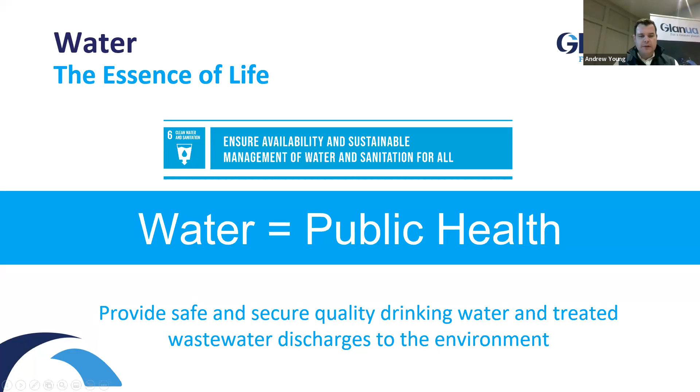I suppose what everyone's maybe thinking is that we've no shortage of water in Ireland. Sure, doesn't it rain every day? And we're surrounded by lakes, we're surrounded by rivers.

We are very fortunate to have sources of fresh water in Ireland. There's still many countries out there that rely on desalination processes to generate potable, clean drinking water. We're very fortunate to have sources of fresh water readily available to us. But there's a lot of treatment that goes on behind the scenes to make that water fit for human consumption, safe and secure to drink. That largely goes on behind the scenes.

Another common misconception is that we have the most beautiful rivers and beaches in the world, and that's correct. We do have very beautiful rivers and beaches, but the reality is that there's still locations around Ireland where we discharge raw sewage into our watercourses. Until recently, there was over 40 discharges of raw sewage around the country.

I know I'm painting a very bleak picture there, but thankfully, since the formation of Uisce Éireann in 2013, over 60% of these untreated agglomerations have been alleviated, and the remainder will be alleviated by the end of 2025.

So the impact of water and wastewater on the municipal, industrial and pharmaceutical sectors. Uisce Éireann, as I said before, was formed in 2013. They produce and supply about 82% of drinking water to the population of Ireland. The balance then is made up by privately owned cooperative group water schemes and private household supplies, be it through borehole sources or spring sources.

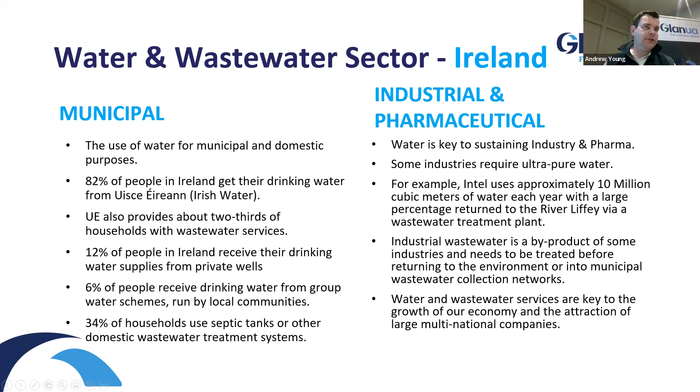As I said before, the water cycle is a continuous cycle from drinking water to wastewater and back into drinking water. It's been in operation for millions of years. It starts with abstraction at source, and we're very fortunate in this country to have multiple sources of fresh water from lakes, rivers and streams, but also groundwater from boreholes and springs.

Generally, it starts with abstraction from the source, some level of screening, and then we enter our treatment process. Within this country, we have various different types of treatment processes, depending on the raw water characteristics. But commonly, we would use a process called CFC, or coagulation, flocculation, and clarification, followed by filtration. Then we'd have various different chemical dosing systems in terms of pH correction, chlorination for disinfection, and also UV disinfection as well. After treatment, the water is stored in treated water reservoirs.

Either above ground tower reservoirs as indicated on the graphic, or ground level reservoirs or buried reservoirs, before distribution through networks into domestic households, but also into industry and pharmaceutical facilities.

From those domestic and industrial facilities, then there's a collection of wastewater. That wastewater is collected in sewer networks before being transported into wastewater treatment plants, where it undergoes preliminary screening, sometimes grit removal, fats, oils, greases removal, before entering a treatment process, which generally takes the form of primary treatment, some form of biological treatment, a final clarification, and then return into the environment.

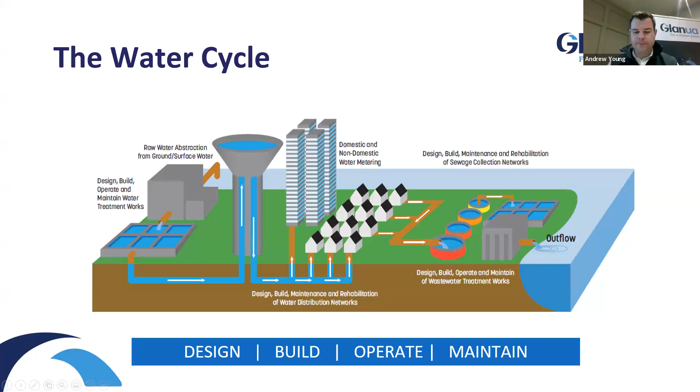A little bit about Glanua then. I suppose we pride ourselves in award-winning innovations and engineering solutions. We're a team of around 350, actually about 370 employees now within Ireland and the UK. We're on a growth trajectory at the moment.

We're on track this year for revenues up on 150 million for our group, which is great to see. We're growing rapidly both in Ireland and in the UK as well. We have offices and manufacturing facilities all across the UK and Ireland.

In Ireland, our head office is based in Loughrea, County Galway. We also have a regional office and manufacturing facility in Navan, County Meath, and offices in London in the Thames Water region and in Sheffield in the Yorkshire Water region. We have over 65 international clients, I'll go through some of those in a moment.

We're all part of the Glanua group, and we've recently went through a bit of restructuring ourselves. Glanua, or Glan Agua as it was then, was bought by an Irish-owned company called BHSL last February. We obtained a number of sister companies, including Hydro International, and we've rebranded our entire group now as Glanua Group under the one umbrella.

Glanua Ireland and Glanua UK offer municipal water and wastewater solutions in both Ireland and the UK respectively. Glanua Industrial offers water and wastewater solutions in the industrial and pharmaceutical space, and also water recycling and water reuse solutions to industry. Glanua Civils underpins and supports all that with civil engineering solutions, primarily for the water industry.

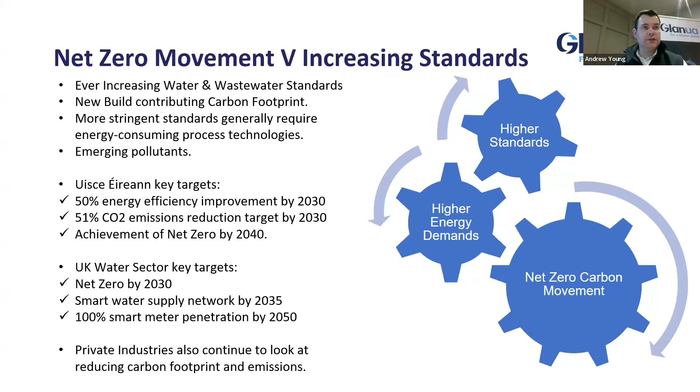I suppose with challenges brings opportunities, and we ourselves, thankfully, have availed a lot of those opportunities and allowed us to grow as a business. Uisce Éireann invests about 1 billion annually. I think this year they're set to invest about 1.1 billion in capital infrastructure, and this is set to increase to about 1.6 billion in revenue control period 4, which spans from 2025 to 2029 inclusive. So a huge amount of growth in terms of investment.

The UK water sector invests about 10 billion annually, and obviously it's a much bigger geography, and they're about to embark on their new investment cycle in AMP8, similar revenue control period. In the private sector, industry and pharma continue to require capital investment in water and wastewater infrastructure.

So I'm going to just spend the rest of the presentation to highlight, I suppose, some of the opportunities that we have seen in the industry: early contractor involvement, sustainable solutions, modular design, DFMA, and offsite fabrication.

I'm going to talk for a little bit about early contractor involvement, I suppose how this has been a game changer for ourselves, the supply chain in general, and also for Uisce Éireann. Just to give a little bit of background as to how ECI came about: as I said before, Uisce Éireann would have been formed around 2013, became active really in 2014.

The traditional procurement route for Uisce Éireann was to bid projects and release projects on a one-off lump sum basis out to the market, which meant they had to issue information to a consultant who would draft a concept design, sometimes obtain planning permission on that concept design, prepare a tender document, and release it to contractors who would bid the project. Five to six contractors, depending, would bid a project. The tender would be returned, evaluated, awarded. Detailed design would follow on construction. Quite a lengthy process involving a lot of resources and a lot of different people for one outcome, one isolated project.

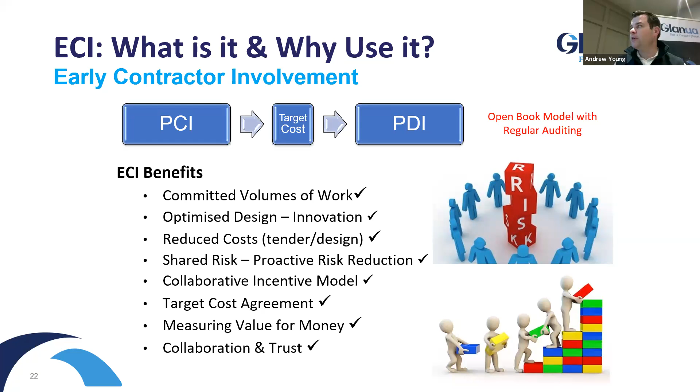In contrast to that, the conventional versus the ECI delivery route, sometimes there can be a lack of clarity. We're working in a traditional tender under huge time constraints to deliver a design that's robust and fit for purpose that we can stand over. There's conflicting objectives - our clients might want belts and braces in terms of a water treatment plant, while we're trying to get the most economically advantageous tender in a short period of time, and ultimately there might be conflict within that. Differing agendas generate internal stresses, and we have wasted effort, as I said before, in terms of multiple contractors bidding a project with one successful, ultimately leading to failed outcomes.

In contrast to that, with a collaborative type model, there's clarity of purpose, everybody's pulling in the same direction. We have joint objectives - we're all measured on the same KPIs as a team. Complementary skill sets, so we can pick very specific skill sets.

So on the ECI we're involved in at the moment, we have ourselves as contractors, so we have the constructability experience. We also have our in-house design team. We have a technical assurance consultant who provides oversight and governance over our designs, to make sure we're on the right track. We have our client as well, another key stakeholder. And then we have a project management consultant who makes sure we're keeping on track as regards the program. As joint management, we're all one team delivering this. We have a joint program board, which I'm part of, and we meet quarterly to review that report. We've integrated processes, a fully integrated team, and ultimately a mutual benefit.

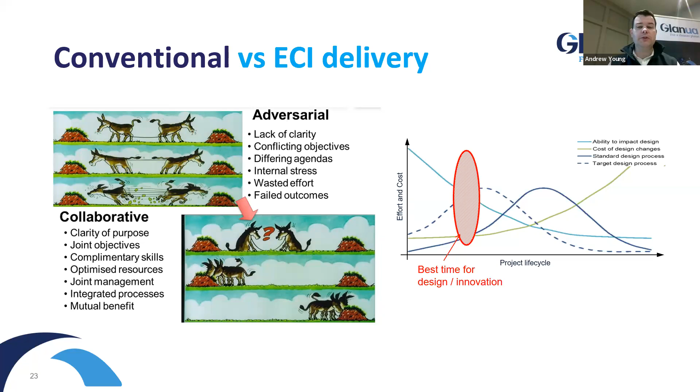To summarize the shared advantages of the ECI: it's a collaborative design construction process focused on quality and efficiency - one team, one goal, heading in one direction. Speed of mobilization, because we have that pipeline of work, we're able to plan projects to roll one after another in a fixed geographical region and build teams, and that allows us to mobilize to these projects within one week of contract award.

Two project examples would be Leixlip UV, where we undertook to install a UV treatment process. This was a design, construction and commissioning project, completed within 8 months. A traditional model of appointing a consultant, doing a concept design, procuring a contractor, detailed design from the contractor and construction would take approximately 3 years.

Similarly, Boherbue wastewater treatment plant in Cork, which has just been completed, actually required planning permission in this instance, yet was still completed within 4 years. Again, the traditional model we would have been looking at about 7 years. So we still very much involve consultants in terms of design development, but rather than consultants doing a specimen design, those consultants are now working with us to develop the permanent design. It's the most efficient use of resources as a result of all of this - we're not tying up people in multiple different processes and steps, tendering multiple projects.

And it's an open book model, so this builds trust and provides full transparency of cost to the client. There's an incentivized pain-share, gain-share mechanism within this, to make sure we're all heading in the same direction and promoted to be efficient, because we ultimately share a gain with the client. For me personally, I think this is a game changer for the industry. It was the first of its kind in the sector in Ireland, and I'd say it's definitely set to be the future of contract delivery in the water sector, and there's opportunities within the wider civil engineering space as well.

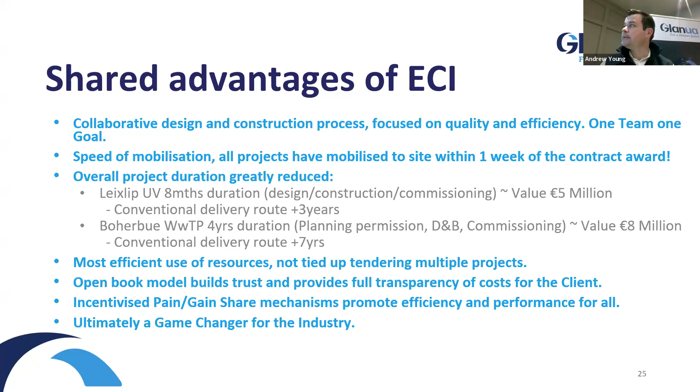Sustainability - I'm probably going to do 2 slides on this: one about what's happening at the moment in the water sector, and another about what the future of sustainability looks like. Glanua as a company, our vision is to be a leader in the water and wastewater industry by providing sustainable and innovative solutions and technology that will ultimately positively impact our future and meet the circular economy needs as well.

In terms of what's happening right now, renewable technologies need no introduction. Examples: solar panels - that's Thurles water treatment plant in County Tipperary, where we installed a solar system on top of the water treatment plant to supplement the energy supply on the plant.

Anaerobic digestion probably primarily exists on the larger wastewater treatment plants at the moment. I think there's definitely scope to roll that out to medium-sized treatment plants as well, potentially even with smaller plants on a more containerized, modular basis.

We also install a lot of hydroelectric turbines on plants. So where we have, for example, mountain lakes or mountain streams or rivers supplying into a water treatment plant, we can harness that excess delivery head, put it through a hydroelectric turbine, and generate electricity to part-supply the plant. We also have nature-based solutions, which are key as well.

The photograph is of sludge drying reed beds in County Carlow that treat the wastewater sludge developed on site, meaning it doesn't have to be transported off site, again decreasing the carbon footprint of the wastewater treatment plant. There's also a lot of work being done on integrated constructed wetlands.

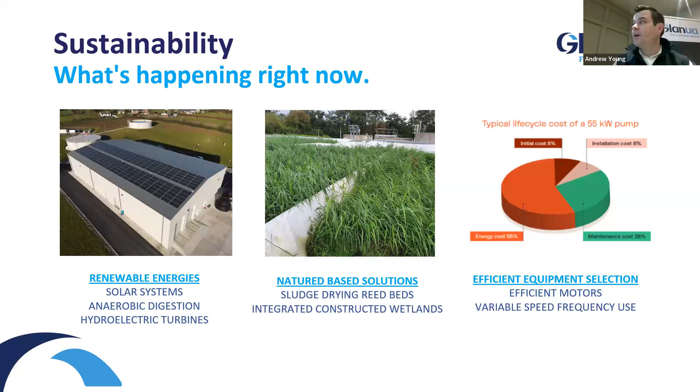And obviously with higher energy costs, there's higher energy consumption. So where it might be perceived that a pump is maybe €2,000 more expensive, if it has 0.5% more efficiency, then it's going to pay off in the long run to have that more efficient pump, and obviously it decreases the carbon effect also of the pump.

In terms of getting to those previously mentioned net zero targets, I suppose the industry perhaps knows what steps 1, 2, 3, and 4 are in terms of the net zero movement. That probably involves some of the technologies on the previous slide - renewable energy technologies, integrated constructed wetlands, etc. But we probably just don't even know yet what 5, 6, 7, and 8 are. And that's where innovation in sustainable technologies comes in.

I think we're all going to have to work together. There's a definite ask out there in the industry for the supply chain, for suppliers and contractors alike, to come to the table with our clients and try to innovate and come up with new solutions.

I suppose two examples of what this might look like just highlight how we're moving towards more of a circular economy. Sludge is no longer seen - municipal wastewater sludge particularly - as a waste product. It's actually seen as a sustainable alternative material.

Municipal wastewater sludge can be used in a process called pyrolysis, which is effectively combustion of sludge or any organic matter with little or no oxygen, which generates a byproduct called biochar. And biochar can be used for soil conditioning, for example, so it's a useful byproduct.

I think we're also going to see a lot more of a move towards alternative materials - certainly alternatives that have a low carbon footprint. We may even have to force ourselves to look a bit at things like where traditionally we would have looked at a water tank as reinforced concrete. Do we look at alternative materials such as steel, which might have a lower design life, but maybe it's recyclable at the end? All these different considerations will come into play.

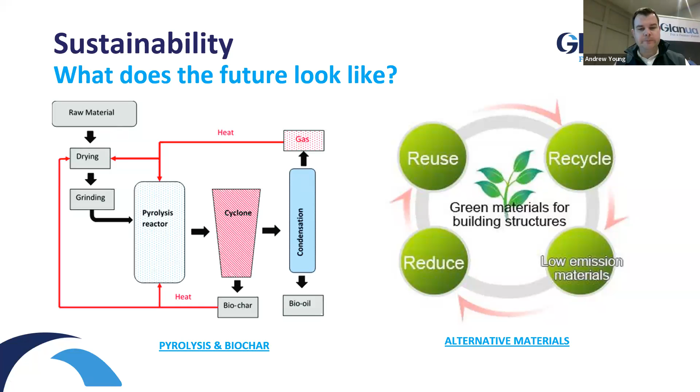So just in terms of modular design, I suppose the industry, like a lot of industries in the construction sector, is moving more and more towards offsite manufacturing and assembly. It's probably a little bit more challenging in the water sector because of the scale and size of the assets in terms of tanks and infrastructure in general. But we're always looking to see what we can modularize.

The photograph on the slide is of a modular water treatment plant. We're building six of these at the moment for Uisce Éireann, which is essentially a mobile water treatment plant that can be lifted on the skid frame, as you can see, transported on the back of a truck, dropped on site. We connect the pipework, the power, and it's into operation. I suppose the benefits of modular construction are far-reaching.

We have reduced time spent on site, which obviously reduces the health and safety risk on site. We have faster delivery times in a controlled environment. We have reduced downtime and interaction with the existing system because it's all manufactured off-site, dropped into place, connected up, and away we go.

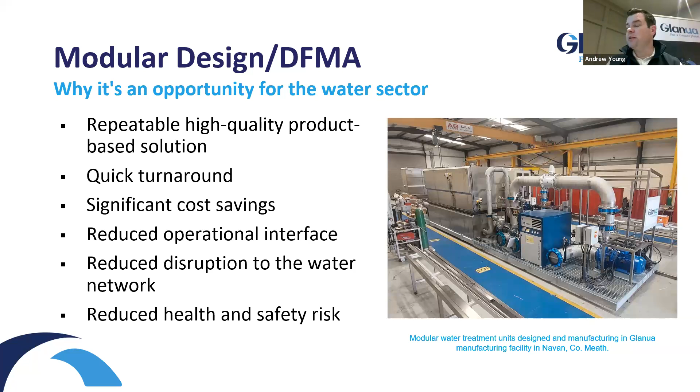With greater quality control, we're in a quality controlled manufacturing environment with procedures around health and safety. We can complete factory acceptance testing in terms of FAT testing before the equipment leaves the facility. It's fully FAT tested. I suppose we have more effective risk management and less material wastage as well. We're able to control, we're operating in that controlled environment. And ultimately, it leads to a decreased carbon footprint.

I'm going to play this video in a moment, hopefully, if it works. And this is a project spotlight, I suppose, on the power of modular construction.

This is Northmoor and Amersham in the Affinity Water catchment, where Glanua, formerly Glan Agua, as we were known then, constructed 2 water treatment plants as part of accommodating works for the HS2 high-speed railway line between London and Birmingham. I suppose there were concerns at the time that tunnelling activity in underlying chalk would contaminate the groundwater sources, rendering them unfit to supply communities in the west of London. So this project, I suppose, was done to safeguard the water supplies in the 2 plants.

A modular approach was taken to this for, I suppose, 3 reasons. Fundamentally, it was for speed of construction, because there was tight timelines to get the tunnelling activities underway. You'll see from the videos earlier, we're operating in a very tight space, in a very urbanized area. Ultimately, the plan here is that when the tunnelling activities are finished, this whole plant could be demobilized, moved to another site potentially as well in the future.

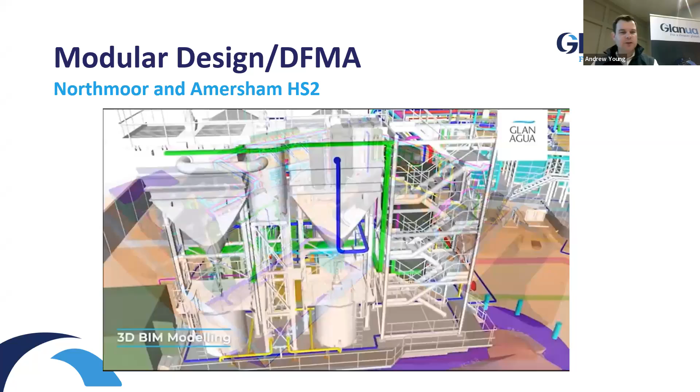So without further ado, there is audio to this. It's not going to play through, but I can actually talk through some of the elements as well.

So you've got all modular pipes you can actually see on the graphic at the moment as well. Glass line steel tanks.

So we use 4D planning to link the program with the delivery of various elements. We can plan out the works effectively for each of the process units arriving on site.

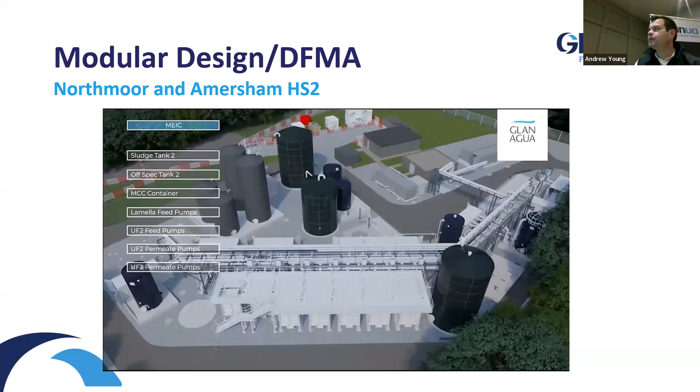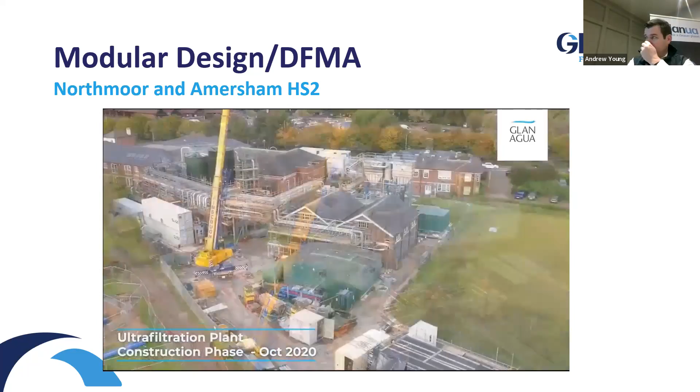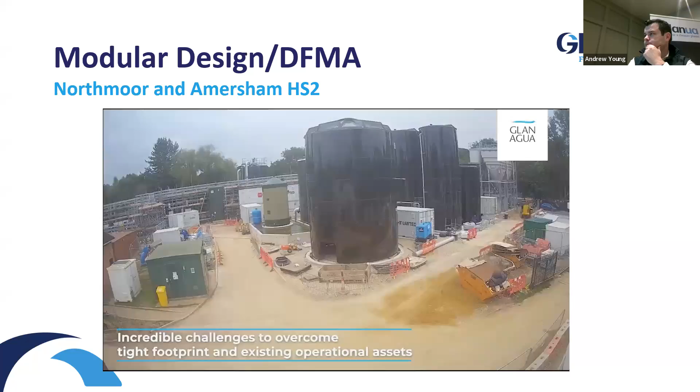So you can see the level, the tightness of the site where we're working to deliver the project. So let's grab some of the finished system.